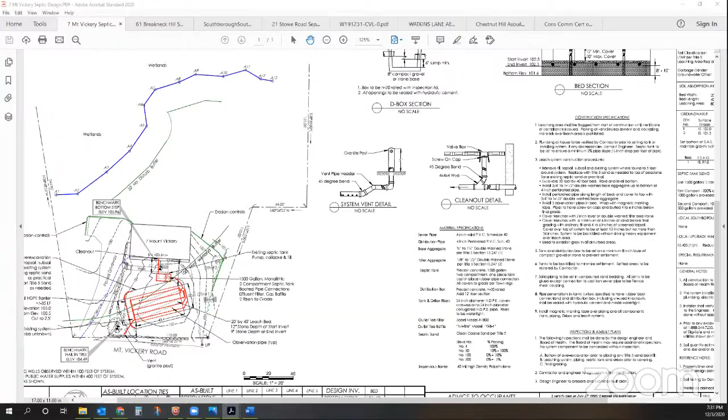Their existing system is in the front yard. We had wetlands delineated in the backyard as shown on the plan. The only practical place to put the system is back right where it is, so that's what we've designed. We put a new system right back in the front yard. It's currently lawn now, and when we're done, it'll be lawn. There'll be no tree removal. Everything is previously disturbed - we're just putting the system back where it is now.

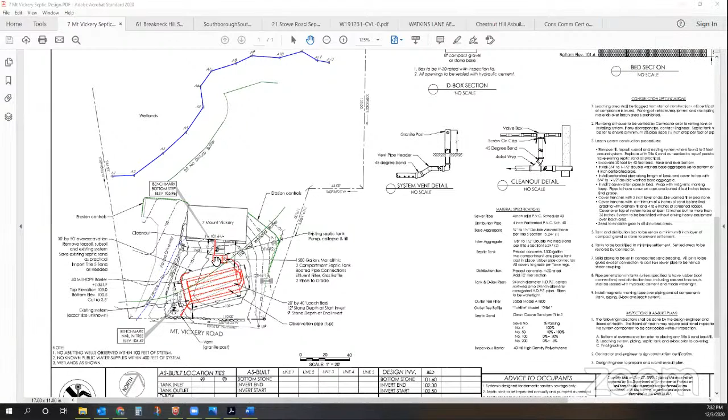Okay, are you looking for a confirmation of the wetland line? Not particularly, I think we just like approval to construct a septic system. And how far away from the wetland is it at its closest point? Oh, about 95 feet. You can see the 100-foot buffer line on the physical plan. Okay, I see it now.

Has this been approved by the Board of Health? I believe they're waiting for conservation approval, but they do have it. Ooh, usually it's the other way around. Well, wait a minute, I'm sorry - this one has been approved by the Board of Health. That's right, the approval went to the homeowner, not to the engineer. I'm the engineer on it, so. Okay, I don't have any other questions. Anybody else have any questions?

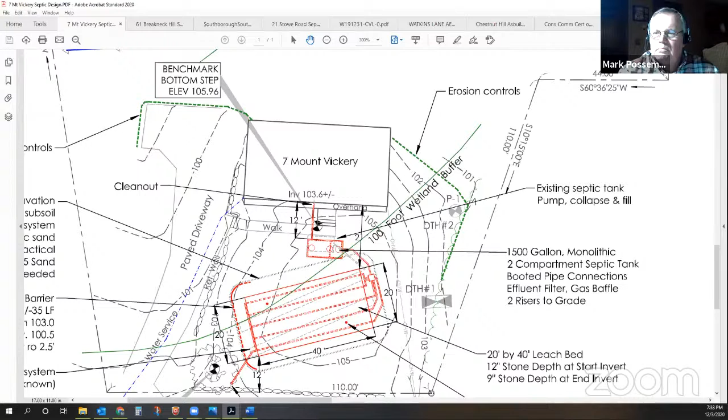No other questions from the commission? So this is determination of applicability. And we did not engage Lucas Environmental on this, did we?

We did. Matt did do a review. I don't see him here. Is he here? Here. Yep. Oh, there you are.

Do you have any comments on this, Matt? No, not really. I walked the site, the wetland boundary looked fine, but as you had asked, they're not really asking for approval of that. Really no other comments. It looked fine to me.

All right, and where the erosion controls are, everybody's happy with that? Which is basically the end of the driveway? Looks pretty flat. Site's pretty flat. It starts to slope down in the back, but I thought the erosion controls looked fine from my perspective.

Okay. Do I hear a motion for... do you want to do the public real quick? Oh, I'm sorry, yes. If anyone has a question, please use the raise hand feature at the bottom of your screen. And I am not seeing any hands.

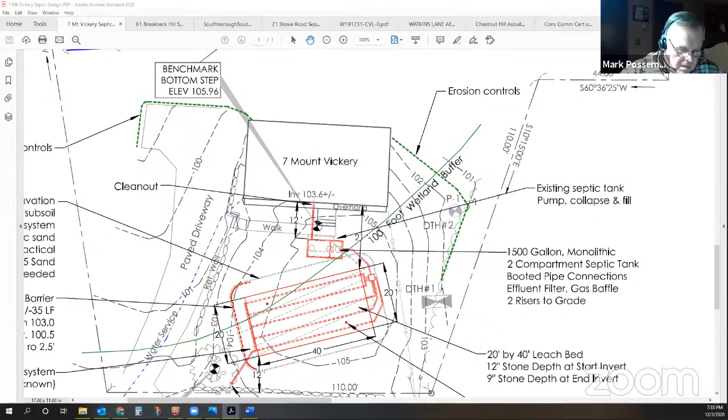Okay, next up is 61 Breakneck Hill Road, map 29, lot 1, a new SMP, stormwater management permit, in accordance with the provision of the Southborough Stormwater Erosion Control Bylaw, Southborough Zoning Code, Chapter 174, Section 13.5. The Southborough Conservation Commission will conduct a public hearing on Thursday, December 3rd, 2020 at 7:10 p.m.

by a virtual Zoom meeting on the petition of Quality Framing Contractor, Inc. for approval of a stormwater management permit for the construction of a single-family house at 61 Breakneck Hill Road, map 29, parcel 1. Mr. Chairman, yes, I'll be recusing myself.

This is my next door neighbor. Okay. So noted.

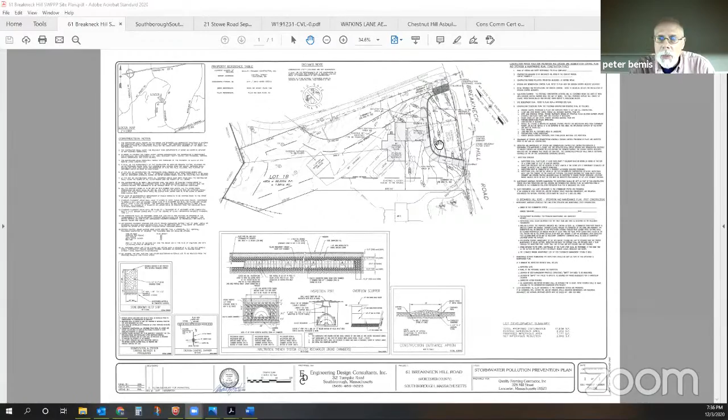Good evening, Peter Bemis here. Good evening, Peter. 61 Breakneck Hill Road is a 68,000 square foot lot. We're on the northwest side of Breakneck Hill Road, and this is pretty much opposite the Harding Botanical Facility. And there was an existing residence on this lot.

It was Ray Davis's home. This is over by the conservation land as well. And the home was razed. The driveway is going through pretty much the center of that old structure, and the new structure is being constructed behind that. We've been limiting our footprint until we obtain this permit.

There is a fairly large lot area here. But with the permit from the board, we would be able to then develop the entire site as shown in the plan. The total impervious area existing is just under 10,000 square feet.

And so with the reduction of existing impervious areas and the construction of new, we actually net out about 2,000 square feet of less impervious area post-construction. There's an existing old barn, garage, if you will, in the back. It's kind of where the cows used to stay in the winter. And the driveway went out to the back of that. So that's pretty much where most of the reduction in impervious area occurs.

100% of the roof area will be infiltrated. There's infiltration chambers that are shown on the plan. And then there's a perimeter gravel stone, if you will, driveway apron. There's also a construction entrance apron shown, although the site already has a paved driveway, so they've been able to maintain the site access as being fairly clean through this process.

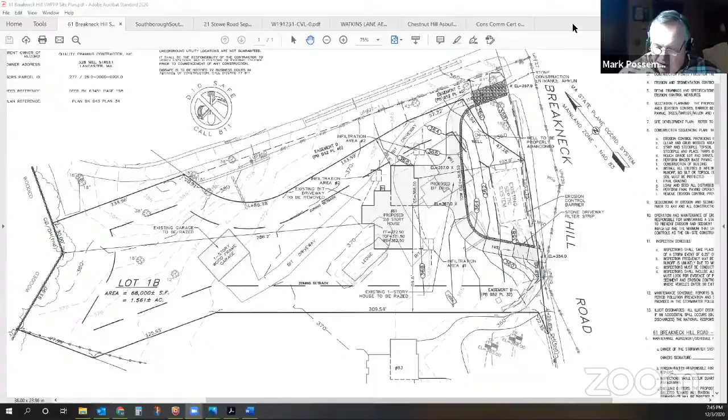Next up is the abbreviated notice of resource area delineation, ANRAD, for 0 Southville Road, map 5 lot 8, in accordance with the Wetlands Protection Act, Mass General Laws Chapter 131, Section 40, and the Southborough Wetlands Bylaw. The Southborough Conservation Commission will conduct a public hearing on Thursday, December 3rd, 2020 at 7:20 p.m. via virtual Zoom meeting. The commission will consider an abbreviated notice of resource area delineation for a project located at 0 Southville Road, map 5 lot 8, for the applicant JAH Properties. The project description is confirmation of resource area boundaries.

It's upside down. They were in the public, but now I can't see them. I will send them a message unless they're under another name.

How about we go to Stowe in the meantime, and... okay. So we'll leave that open for the time being and come back to it.

So 21 Stowe Road, it's a request for determination of applicability, map 91 lot 1, replacement of septic in accordance with the Wetlands Protection Act, Mass General Laws Chapter 131, Section 40, and the Southborough Wetlands Bylaw. The Southborough Conservation Commission will conduct a public hearing on Thursday, December 3rd, 2020 at 7:30 p.m. via virtual Zoom meeting. The commission will consider a request for determination for a project at 21 Stowe Road, map 91 lot 1, applicant Tom Truong. The project description is replacement of failed septic after emergency certification.

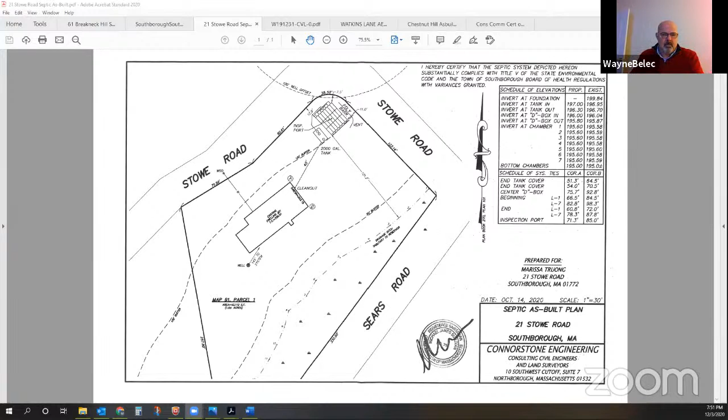His finance source is a little freaked out with COVID right now, so they're probably looking to table this, see what happens with COVID through the winter, and look to resume in the spring. I did get him a proposal, but he hasn't signed it because he just wants to see what's going on. So we did go with the ANRAD route.

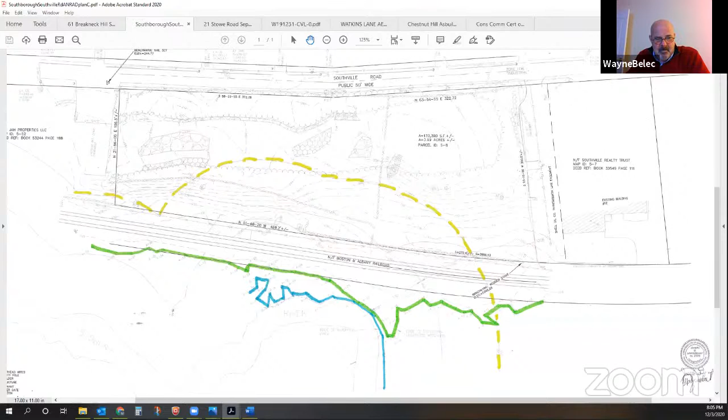Okay, thank you very much for the summary, Matt. I thought that was absolutely spot on. That's what I would have said also.

Yes, I think it's a great idea for us to meet out there, and I just wanted Matt to know, feel free to email me when you get a second and give me some open dates in the next week or so, and we'll meet out there. Okay, good.

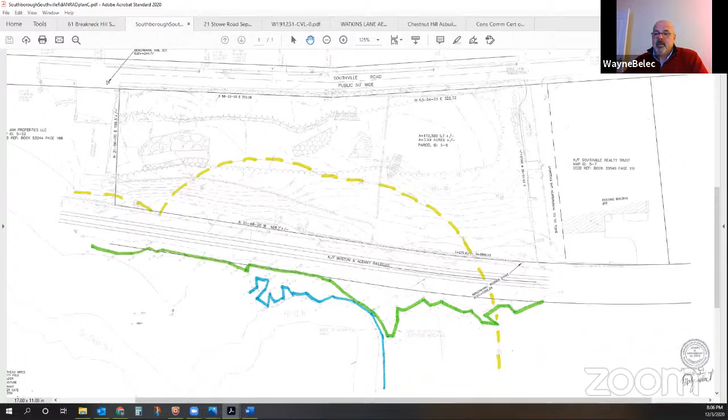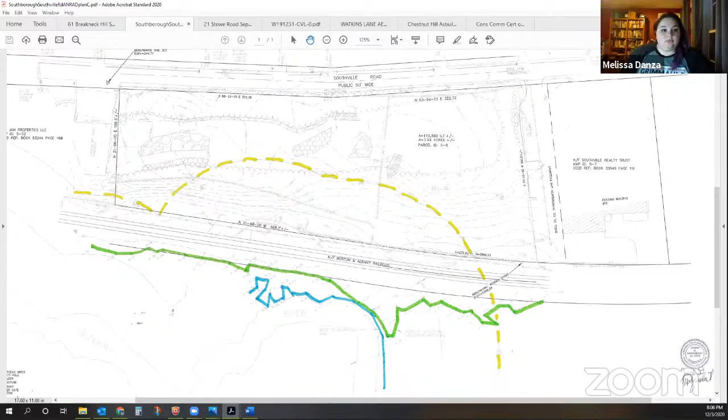Okay, next we have 96 Mount Vickery, lots 1 through 5. Where are we here?

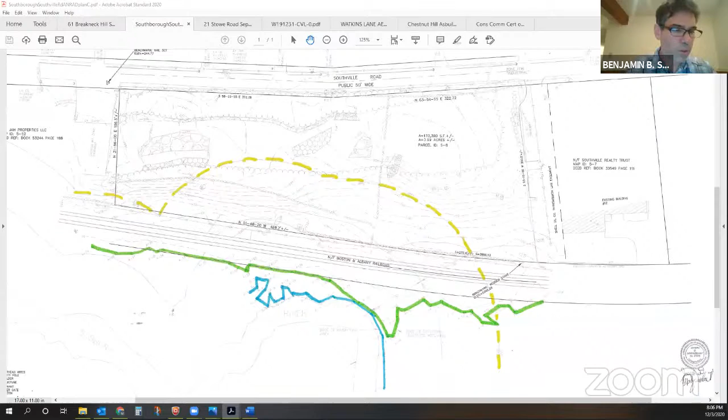In accordance with the Wetlands Protection Act, Massachusetts General Laws Chapter 131, Section 40, and the Southborough Wetlands Bylaw, the Southborough Conservation Commission will conduct 5 public hearings on Thursday, December 3rd, 2020 at 7:40 p.m. via a virtual Zoom meeting. The commission will consider 5 notices of intent for projects located at 96 Mount Vickery Road, lots 1, 2, 3, 4, and 5, to be known as Ruby Estates, map 28, lot 18, for the applicant Bartolini Properties. The project descriptions are construction of single-family homes, septic, and associated infrastructure, including stormwater features. These hearings will be held concurrently.

Okay, who do we have here this evening presenting the plan? Good evening, Jim Bernardino with Bohler Engineering, representing Bartolini Properties for the applications in front of you this evening. We do have Michael, Tony, and Greg from Bartolini Properties also online or at least in the waiting room. They may chime in from time to time as I go through my presentation, or they're available for questions and answers as well.

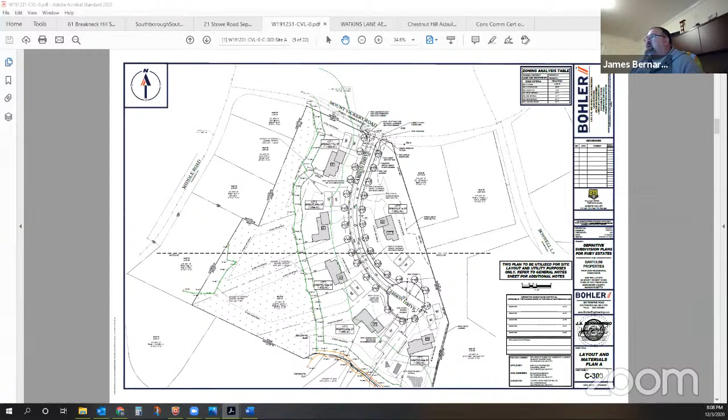Melissa, maybe it would be worthwhile for me to share my screen. I'll run through the plans, and I could pan and point and highlight particular areas, if that's an option. All right, just give me one second. No problem, I think it'll go a little smoother that way. All right, you should be all set to share. Let me just maximize that one more time. Share. Here we go.

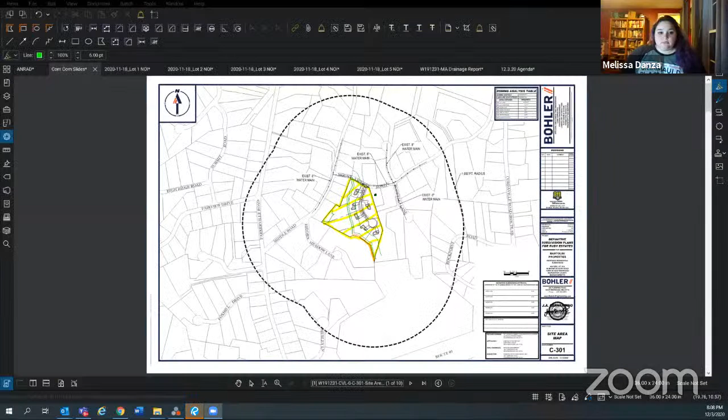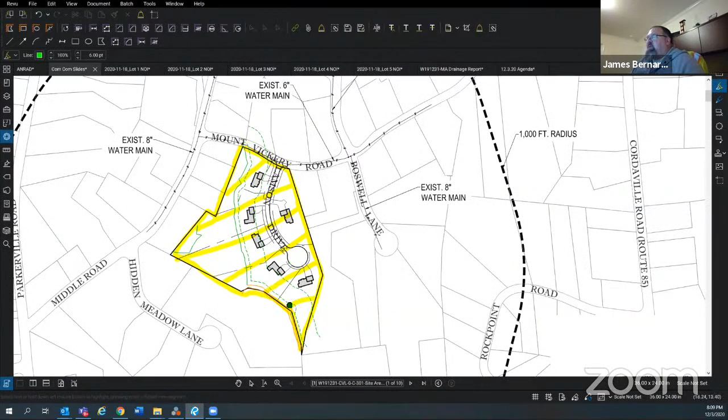Okay, here we go. Everybody should have a PDF of the overall site area map. For those not familiar with where the site is located, it is 96 Mount Vickery Road, south of Route 9, off of Middle Road, south of Vickery, bounded to the south by a residence along Hidden Meadow Lane, same thing with residents along Roswell. Highlighted area is the subject site.

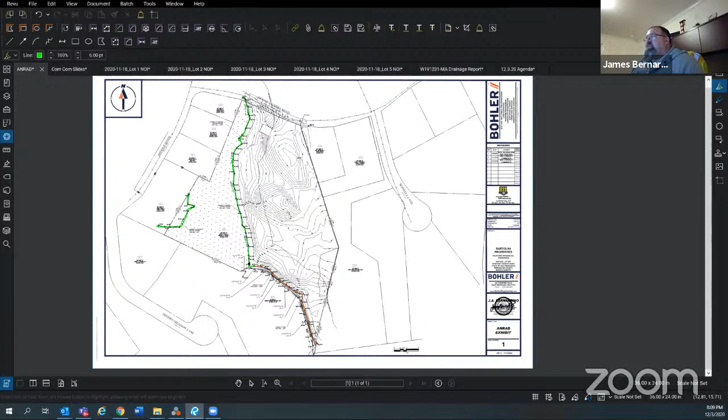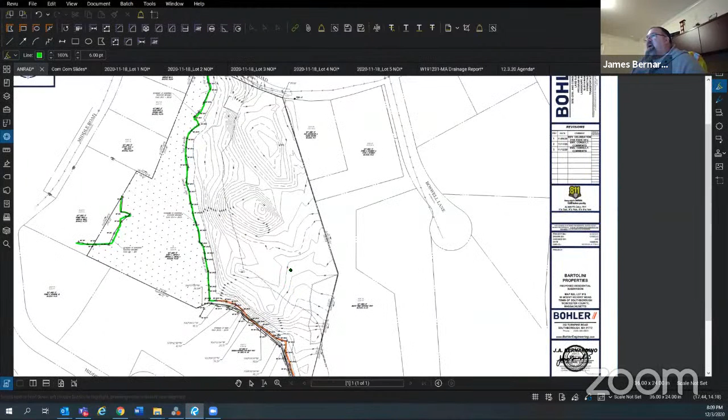You may recall last month we were in front of the commission to discuss the ANRAD for the resource area for the subject property. This was the ANRAD plan approved last month, showing in green the limits of the approved bordering vegetated wetlands, as well as the orange area, which was the edge of bank. Both resource areas were discussed with the commission, reviewed by your consultant, Lucas Environmental, and ultimately approved last month at your hearing. These wetland lines were the basis and limits of consideration for the development of the proposed residential subdivision, being called Ruby Estates.

Ruby Estates is going to be a proposed subdivision consisting of a proposed roadway of approximately 570 feet long. That roadway will allow for the creation of 6 residential lots, all having a minimum lot area of 1 acre or greater.

Before I dive into the specifics of the site, I'd like to give the commission a little background as to how the applicant came to this plan as a final proposal to the town. Over a year ago, the applicant gained development control over the property. Things were a little slow at the beginning because of COVID.

Over the last year, they've considered multiple layouts for the proposed development in consideration of minimizing the overall footprint and impact of the proposal. They initially prepared several alternatives with a smaller footprint that would fall under the town's regulations for a flexible development, allowing for a shorter roadway, potentially smaller lots, and an overall smaller development footprint. The applicant took those alternatives and discussed them with the planning board on multiple occasions. After several meetings, the ultimate resolution and directive was that a conventional subdivision was the alternative proposal for this site.

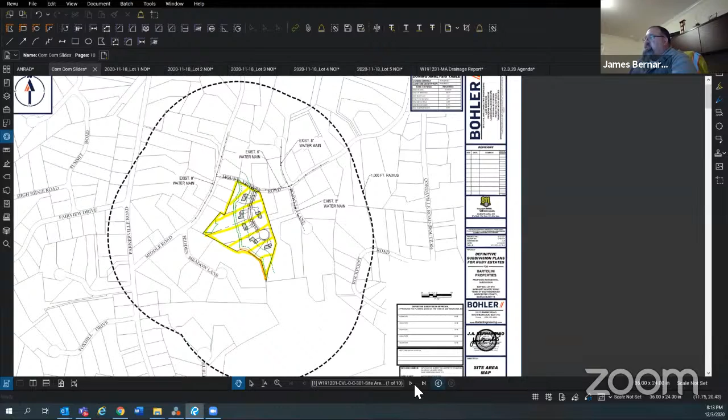I'll zoom in. So we have our proposed roadway. There's an existing house located in this area here. That house will be demolished, razed completely as part of this overall development.

That being said, it does have existing water service, and the entire subdivision will also be serviced by public water. However, we have been doing soil testing on the site to allow for proposed septic systems. Each house will have its own individual septic system, and the layouts provided to the commission show proposed locations we are currently working on and seeking approval for from the Board of Health.

Looking at lot number 1, the edge of wetland is shown in green. The locally regulated 20-foot no-disturb buffer is also shown as an offset, and all work is located outside of that 20-foot area. On lot 1, the house is located primarily entirely within the 100-foot buffer zone. The limit of the house is approximately 47 feet off of the closest point of the bordering vegetated wetland.

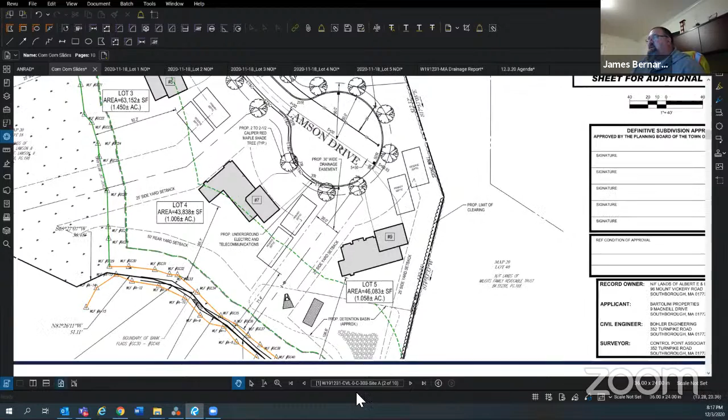Moving back around, let me go to the next slide. So this is lot 4, even though it says number 7, that's just going to be the future street address. Lot number 4 is, again, just over 1 acre, as is the majority of the lots.

The house is going to be situated approximately 85 feet off the nearest regulated resource area, which is where it turns into the bank for the intermittent stream along the southwestern property line.

Lot number 4 is going to result in approximately 16,000 square feet of buffer zone alteration. The primary septic field is anticipated to be located outside of the 100-foot buffer, with the reserve area split between the 100-foot buffer zone and outside of that regulated area.

Lot number 5, the house is completely located outside of the buffer zone. However, there will be some minor alterations along the edge for the construction of lot grading.

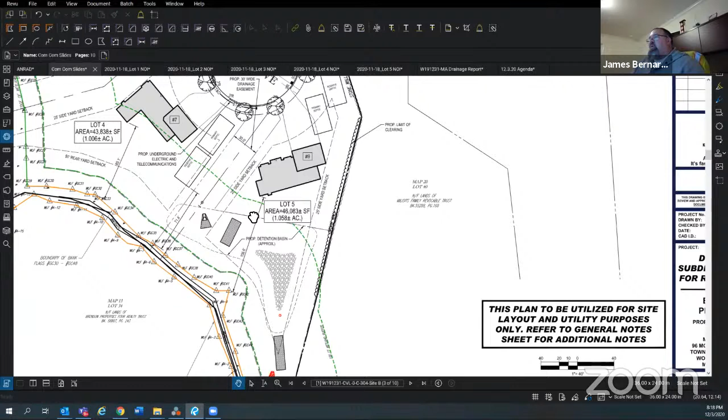As we mentioned before, we will be doing a separate notice of intent coming up in a couple of days. Hopefully we'll be able to hear this concurrently the next time we discuss the project with the commission. But that forthcoming notice of intent will cover the impacts associated with the drainage infrastructure for the overall subdivision and roadway. That subdivision and roadway within lot number 5 would result in approximately 18,100 square feet of buffer zone alteration.

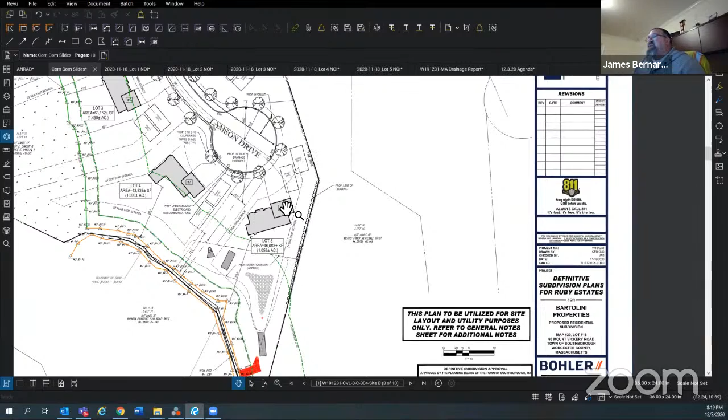Again, that detention basin will be designed such that no alteration to that 0 to 20 foot regulated area would happen. So no alterations 0 to 20 feet. And septic systems associated with lot number 5 are anticipated to be located outside of the 100-foot buffer area.

Lot 6, there's no notice of intent for that, but as you can see, that's on the other side of the roadway, which is outside of the regulated areas of the bordering vegetated wetland or the bank resource area that's on site. Likewise, the entire roadway is located out of that 100-foot buffer zone.

As part of the overall subdivision, we did take a look at impacts cumulatively of the overall development. The impacts were analyzed for various different aspects.

One, erosion control. We have developed a comprehensive erosion sediment control plan as part of the development package and the subdivision plans that were in front of the commission. We've also developed a comprehensive stormwater collection, conveyance, treatment and infiltration practices, which are inclusive of deep sump catch basins, a sediment forebay, and a BMP water quality practice infiltration on lot 5 itself. The proposed design does meet the stormwater standards for water quality, treatment, and infiltration practices, and the like.

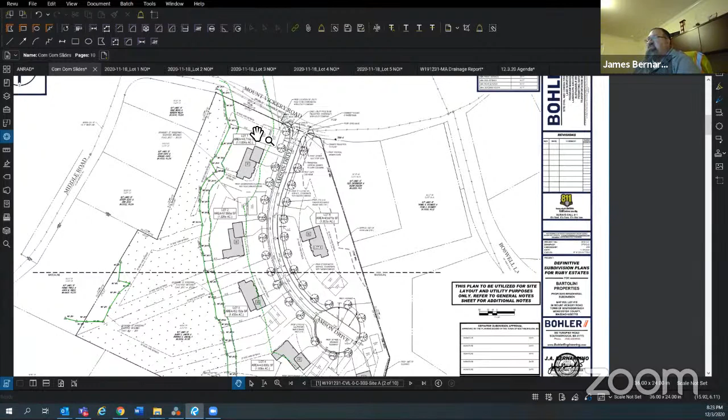Another comment that was brought up was a consideration that we look at seed mixes along the edge of our development. This is a grading plan, and we do have some 3-to-1 slopes along the perimeter of the site.

It recommended that we take a look at potentially utilizing a different seed mix than normal that would be more indicative of woodland wildlife or woody value type of seed mix. I do have a landscape architect on staff. We'll consult with him and the applicant to find out what best practices can be implemented to enhance the value of that area as it is in proximity to the resource area. So we will take a look at that, consult with our landscape architect, and develop a plan to see what can happen for enhancements in those areas.

Number 4 would be to adjust the erosion controls along the limits of work. Basically, the majority of the erosion controls at this point run along the barrier or the perimeter of that 20-foot offset. There are locations on the site where edge of grading and limit of work are a little further away from that buffer. We can make those adjustments to minimize the extent of the limit of work and bring it closer to the limits of the proposed development and grading.

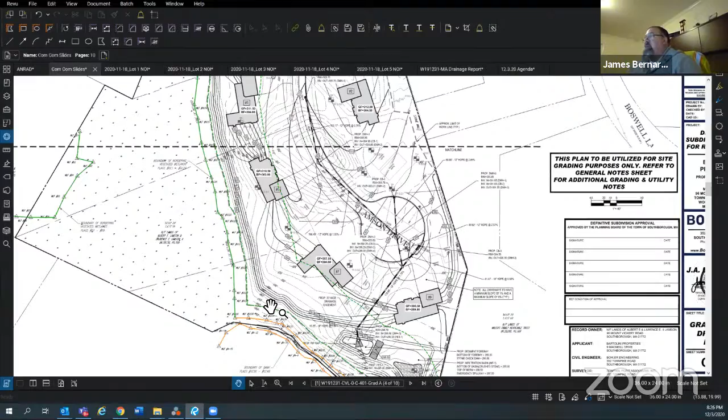Lastly, we did receive, and I'm sure the commission has copies as well, numerous letters from the neighbors in the surrounding neighborhood voicing their concerns about the proposed development. Obviously, the development as proposed does have impacts, and the concerns voiced by the neighbors are impacts that resulted directly from the construction of the subdivision. Some of the comments were about the value of the upland areas, some drainage concerns, and groundwater concerns as well.

Our plans and our comprehensive stormwater evaluation have considered those potential impacts with our designs, from a stormwater perspective and erosion sediment control, and the BMPs that have been implemented for construction activities. We believe that those types of impacts the neighbors have voiced are addressed with our design plans and the computations that have been provided to the commission.

Lastly, many of the neighbors have spoken out regarding the developer's past project and how he's currently altering land with clear cutting. Obviously, that's not the developer's motive. What's mentioned by several of the abutters as clear cutting is actually not the developer's project. They're talking about a development down the street that's currently been clear cut, which is directly adjacent to a development the applicant has constructed. However, the applicant, Bartolini Properties, has no association with that current clear cutting operation. Bartolini Properties is actually disappointed that's happening directly adjacent to their property, because that is affecting their past customers and the overall presence of their development.

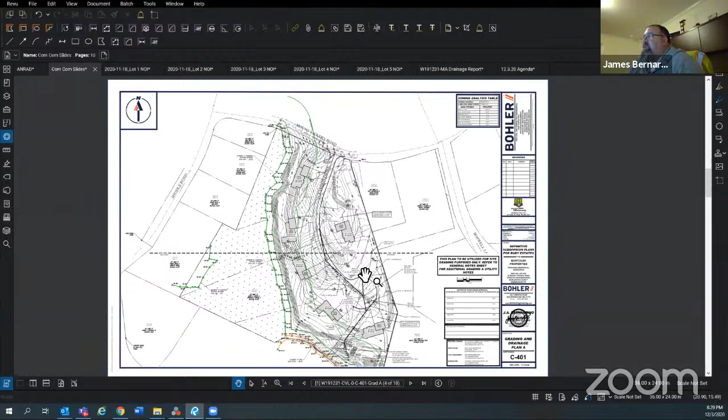If anybody from Bartolini Properties wants to add anything, feel free to jump in as well. But at this point, I would turn it over to the commission for feedback and any comments you may have. Thank you, Mr. Bernardino.

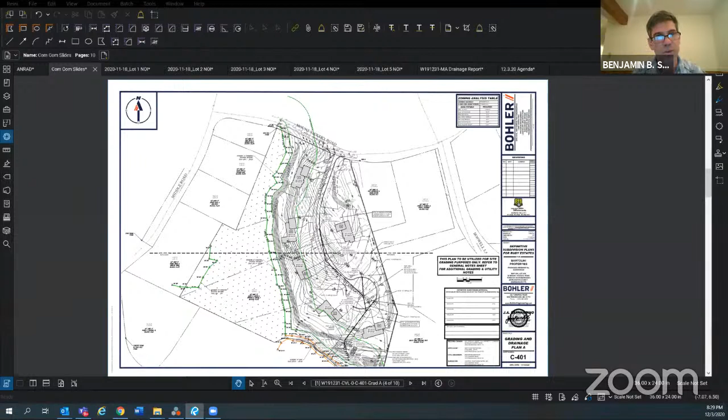So we are still waiting, of course, on the notice of intent covering the roadway and detention pond and all the drainage work associated with that, as well as the stormwater management permit, which I understand is going to cover the entirety of the project in a single application.

Melissa, we are waiting to submit this to Fuss and O'Neill for review until we receive those materials. Is that correct? We received the materials, I got the task authorization from Amy from Fuss and O'Neill, so I sent the amount off to Bartolini. I'm just waiting on that check, and then that review will start and it will be on the agenda for the 1/7 meeting.

And for those in the audience, Fuss and O'Neill are consulting civil engineers who are going to be doing an engineering review of the project on the commission's behalf.

Our environmental consultant, Lucas Environmental, was referred to by Mr. Bernardino. Matt, do you want to go through your comments?

I think Mr. Bernardino hit them pretty well, to be honest with you. I think the only one I would focus on a little bit more is, again, a lot of the comments are common across all 5 applications, with the difference being on lot 1, the question of the demolition work, and on lot 5, the question of a separate notice of intent for the infrastructure. I think it sounds like both of those have been addressed. But I'd probably focus in on the comment with regard to the amount of proposed clearing on the site. And I know Mr...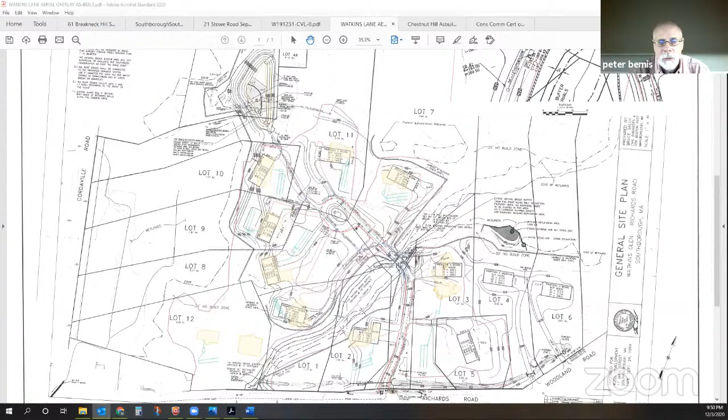That's it as far as the words are concerned. The plan in front of you is probably the most important thing. Melissa had said, look, can you provide us with an as-built? So this plan is a red line as-built, overlaying the plans done by Bruce Salick Associates, which was the permitted plan for this project. You'll see the roadway is constructed pretty close to what was proposed.

There's very, very slight deviations in the shape and geometry. The houses—I'm sorry, the color's not coming through great here, but on the color plot Melissa got, it's pretty good. They're kind of in an orange color, and we show specifically that outline.

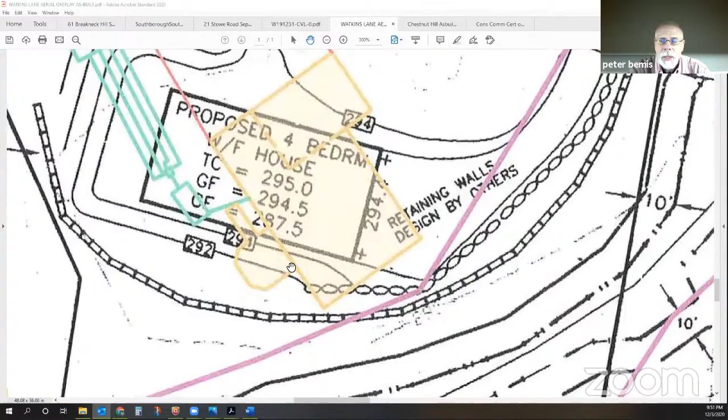You'll see, for example, that is the lot 1 close-up now, and again, that has its own certificate of compliance already issued. What we're asking you for now is for that old order. But we brought in the details that we had available to us, which is the driveway location, the building envelope, the septic system, and then the limit of work.

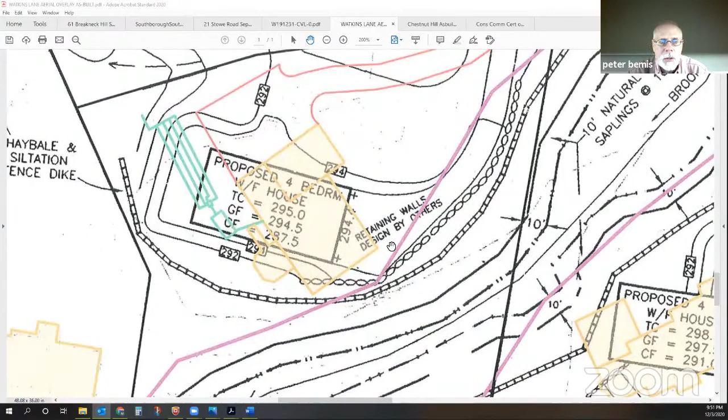This heavy pink line here running throughout the site is the limit of work. Fortunately, with the advent of GPS, we were able to get a nice, good, accurate reading on that for this project. If you could just pan over to lot 3, because it's lots 1 and 3 we're going to get tonight.

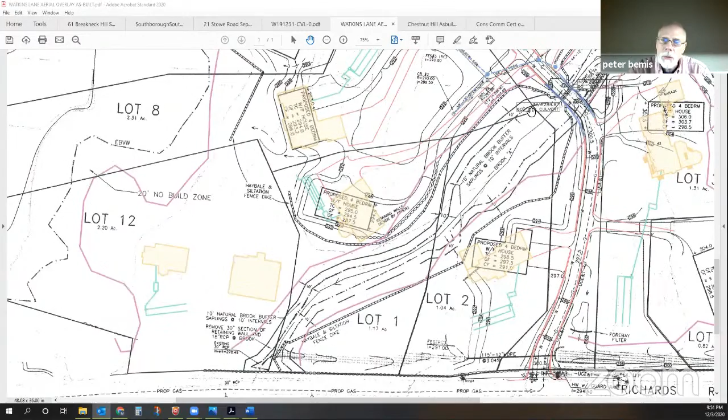On lot 3, you can see the house was actually moved considerably away from where the wetland resource area was in the base build, and the small garage located to the north is what was on the order of conditions for 863 that I've asked you for the certificate on.

Again, they follow the limit of work pretty closely. Drainage is also shown on here. If you just pan a little bit, you'll see the crossing here. There's a retaining wall that was built, and then there's a series of catch basins that go out to the stormwater management system. For the meeting in January, we'll try to get our arms around all of that.

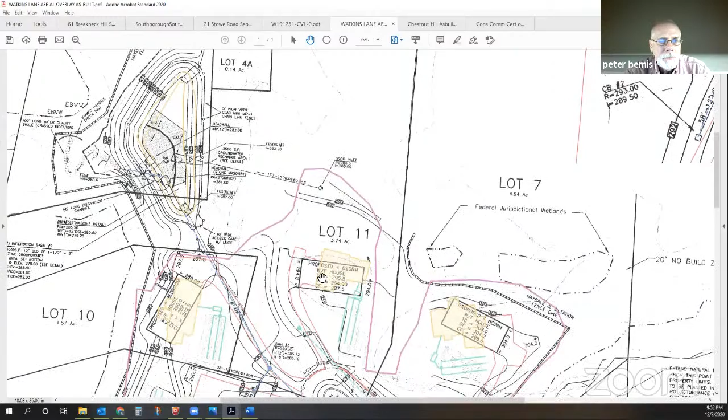So I'll be happy to answer any questions. Thank you.

Go ahead, Phil. So I guess the question is, do all these lots satisfy the order of conditions? Yes, to the best of our ability that we could find, they satisfy the original order.

These were also amended, and they were amended all in one amendment. So it's taken over a month to really go through all the filings to determine which lot was which application and what they were trying to get across.

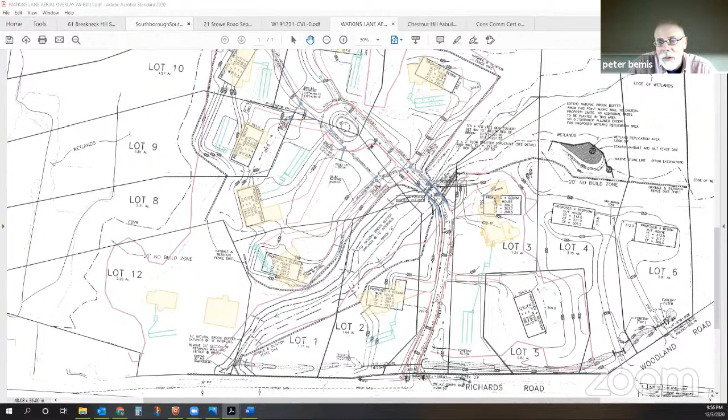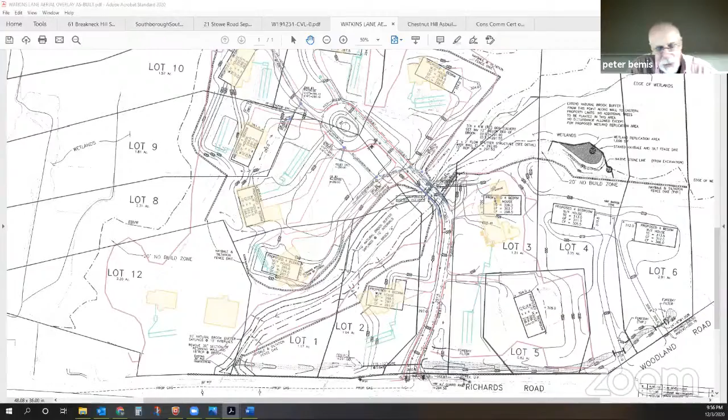It's not even on any of them, Matt. Again, this was not done in a uniform way at all. I don't even know how they doubled down on every lot too, so they submitted 2 lots per notice filing. Obviously I think they did it to save money, because I think they did it as one application. But again, that's so long ago, and unfortunately we have this paperwork we have to try to walk through.

Melissa's been kind enough to meet me. She brought her whole file outside. I took pictures of all of the sheets because, again, with COVID, it's just hard to be able to reproduce some of these documents.

Like I said, what I was comfortable doing tonight with you was asking you for these 2. They are totally independent, well, they rely on the driveway for their access, not their frontage. Lot 7 relies upon that. And I'm only asking you for the partial because I think an attorney would surmise, how do I get to this house if I don't go down the street, and how did you get permission to be there? So I'm only asking you to sign off on the lot itself over that portion of the road. And when I come back on the January 7th meeting, I'll try to define all those other pieces better.

We didn't even get to go look at that replication area from my perspective in my office. I wasn't prepared to do that in the timeline that we had. And there are also 4 total notice of intent, so it's not even just these 2 that we are thinking of doing, or partials and maybe a full one. There's 2 others that address other lots, but also other aspects of this development. So it was kind of awkwardly done in that some have very lot-specific ones, and I think the ones that Peter did pull out for the most part are ironically the more specific ones. So there's at least 2 others that we have to address as well.

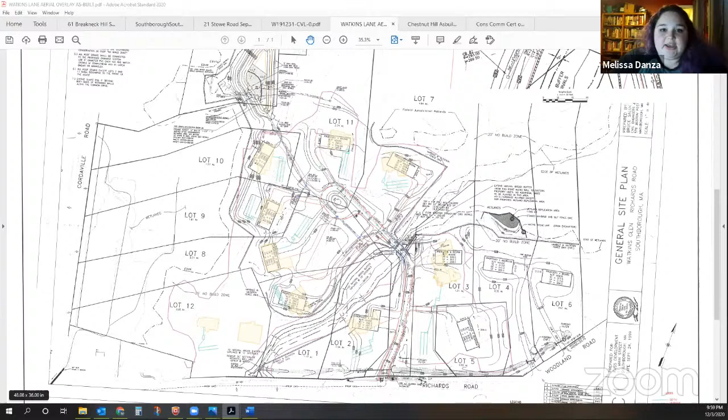So my recommendation would be to issue a full certificate for 290-863, which is 3 Watkins Lane, a partial certificate for 290-581 for lot 3, which is 3 Watkins Lane, another partial certificate for 581 for lot 1 Watkins Lane, and a full certificate for 290-586, which is for lot 1 Watkins Lane.

Very quickly before we vote on that, I had one quick question. Peter, you mentioned that some of the wetlands had some trash in them or something. Was any of that near these ones that we're issuing orders of conditions for? Specifically, the garage looks like it's very near the wetland. Is that clear now? Yep.

I'll answer you honestly here. As I said, I did clean up all the areas specifically for the lot 1 property back in 2008. There were some leaves over by the bridge, but that's associated with lot 7 itself, it's on lot 7. So when I come back to you for lot 7, it's going to have to be cleaned up. I've told the HOA that they will have to clean that area up, and they're aware of it.

And on lot 3, there was a tree that had come down on the Burns property on that side of the garage, and some of that brush is still there. The landscaper is going to remove it. I have both the word of the owner and the landscaper. I said to Melissa, I have no problem with you holding that until I tell you that it's been done. I've given her my word on that as well, so I'm fine with her holding that until I prove to her that the brush has been removed.

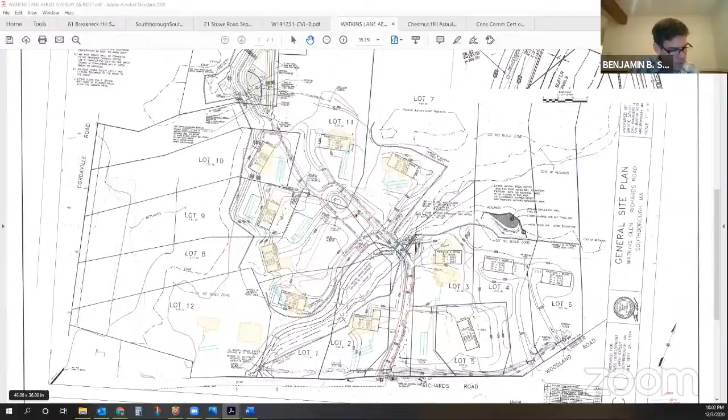Okay, another certificate of compliance on Chestnut Hill Road. That's right, the widening there. Sorry, can I just, two-way.

Sorry, Ben, can I just say, Melissa, that I think that was a really great piece of detective work, partnering with Peter in order to get that done. I think it was a couple of meetings ago we had the discussion about the importance of the annual report and how it saves both the applicants and the commission a huge amount of time if we make sure all these things happen on a timely basis. I think that was a perfect example of why it's so important to be able to keep that audit trail. So kudos to you for doing that.

Thank you. This was definitely some detective work because most of them didn't even reference like lot X for Watkins Lane. It was literally all the roads that surround it. So we went through that whole section of time to figure out which ones may be possible versus not, and thankfully it was just 4. Sometimes the numbers didn't make sense, but that's okay, we got it, maybe. So we'll move forward, but this was an interesting one.

All right, is there anyone here for Chestnut Hill Road? Oh, you said Vito is on vacation or something. Yeah, and Matt did do a review, if he wants to go over it. There wasn't anything, at least that I saw, that we needed Vito for.

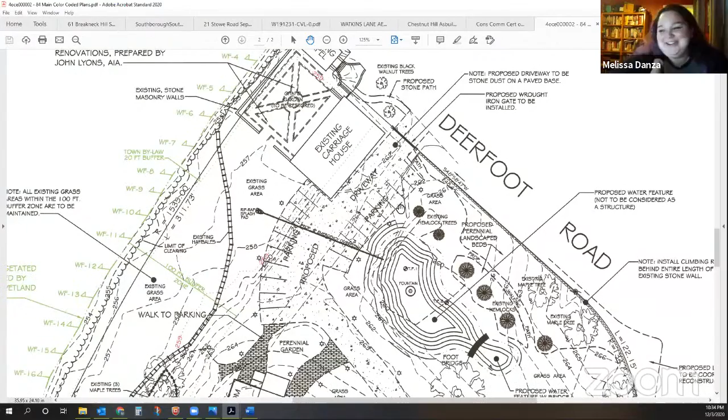Yeah, I think that's something we have to look into. And I don't mean to stop discussion in any way on what Russ brought up. Every time I drive past there and see it from Parkerville, taking my kids back and forth to school, I kind of grit my teeth every time. This isn't what we were told was going to happen.

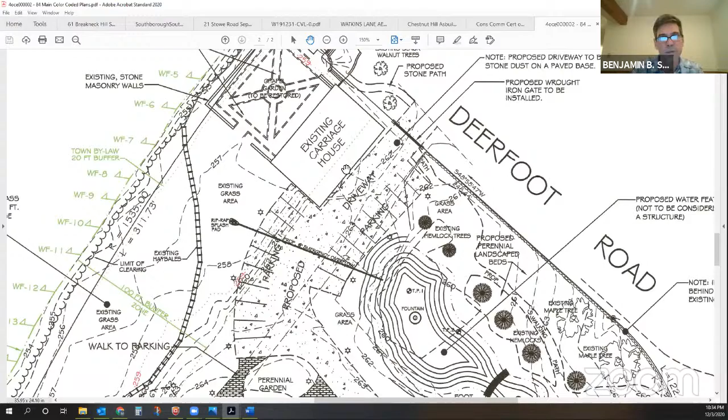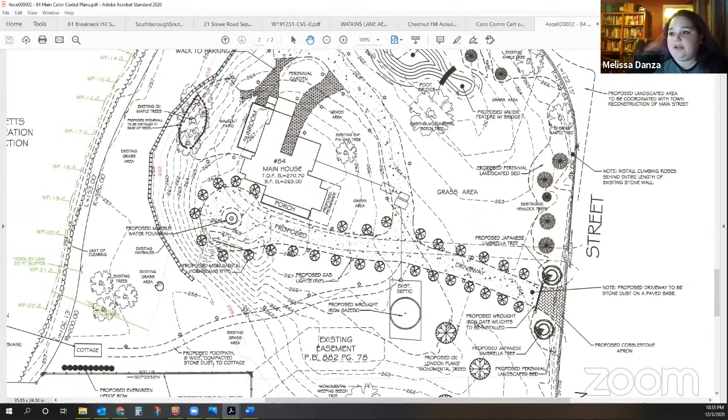I also have a follow-up with Peter about the final spec plan for this rain garden area, because I never received that as well, so that's also on my docket. I don't believe they've started that, and that's probably why he hasn't gotten it to me. I know he's been pretty backlogged, but at the same time, this site has had enough issues.

I did see it looked like there was a lot of activity around the cottage when I drove by the other day. Yeah, looked like there was a lot of contractors working, roofing it last week. Yeah, they were putting a roof on last week.

So I'll follow up with them about the spec plan for this, when the planting and scaling back of the riprap is going to be. Ask him when he's going to take out the riprap. I think it was difficult to understand, in that the original request for the clearing of that embankment did include riprap, just not to the extent that it was installed.

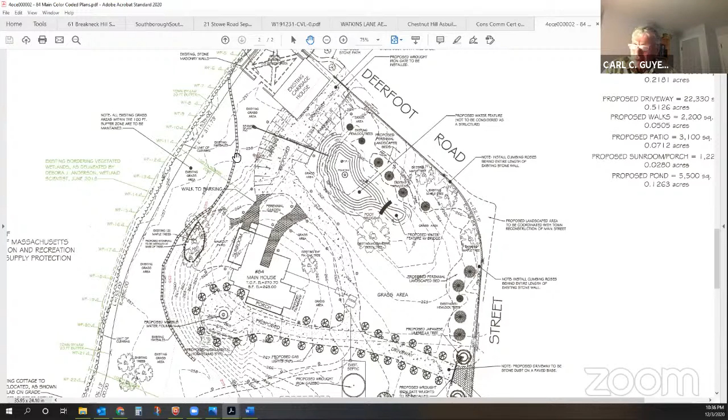No, Melissa, can I interrupt you? The plan that was presented to us, there was no mention of riprap. He presented a different plan to DCR, is what I think happened. We did receive the same documents. I think what's difficult is that he geared it more towards the invasive management aspect of it and didn't necessarily highlight the final conditions, which may be where the differences lie.

But could we still ask to have it all taken out, since he hasn't complied with what he told us he was going to do? Right, yeah. No, but I will follow up with Peter and JDP about those.

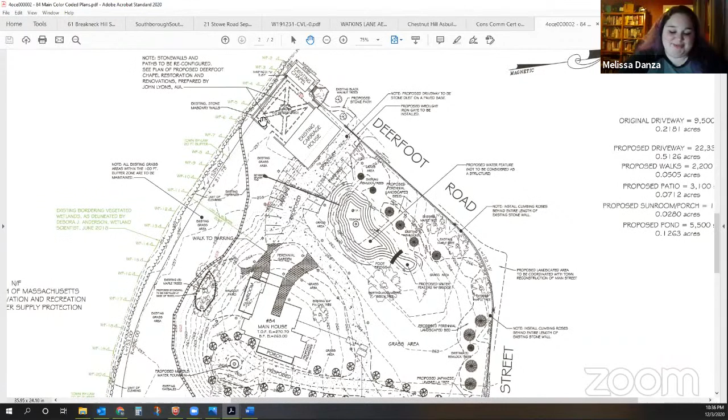Yeah, you can quote me as the bad cop, right? I don't need a bad cop. It's fine. All right, one other bad cop issue down the street from me on Middle Road. I don't know if you guys have been over there to look at that.

We approved a notice of intent for the wetlands, right? And they told us they weren't going to need a stormwater permit because the disturbance was going to be less than half the lot. And boy, it doesn't look like that now. They've also gone over to the next lot, and I think they've disturbed enough area to require a stormwater permit there too.

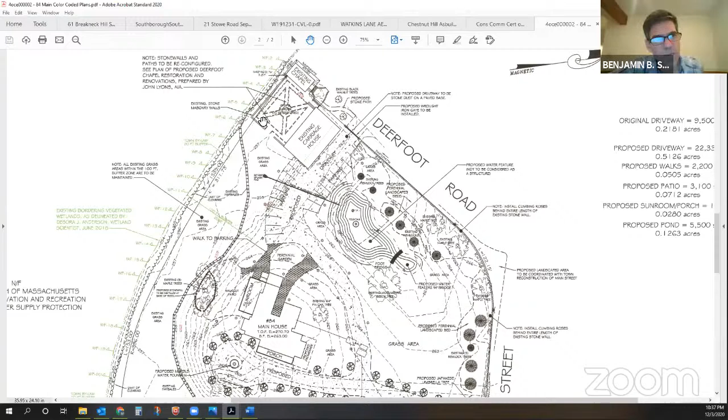This across from Fay School? No, this is just down the street from me. Oh, excuse me, I'm sorry. This is next to the trolley line. Yep, next to the trolley line, right? So it looks like they either don't understand what we're telling them.

Not to cut you off, but they have submitted 3 SMP applications after the fact. I know, so this was one of my other business items to bring up, in that what does the commission want to do in the meantime, because they have gone over the threshold.

I have had some trouble communicating with the builder. Peter is also the point engineer on this, in that last week my request before Thanksgiving was to have erosion controls in and come into as much compliance with the stormwater bylaw as possible. Yes, it's a holiday weekend, but this was extremely important, especially on the wetland side. And come to find out, on Monday when I followed up and was talking with Mark earlier in the week, they had still not been installed.

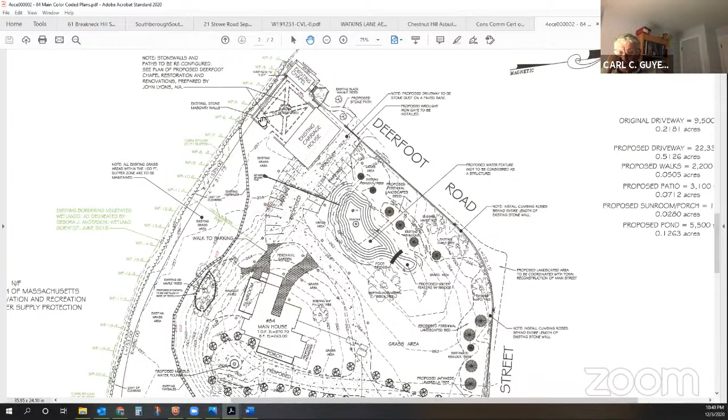Well, I'm in the camp that they should stop, stabilize, and then wait for their stormwater permit. I mean, we can only get run over so many times. They should have known better. They did know better.

I tend to agree with Carl. I mean, we try and be mindful of individual situations, but this one just sounds as though it's too much of a variation. So I think we should say cease and desist.

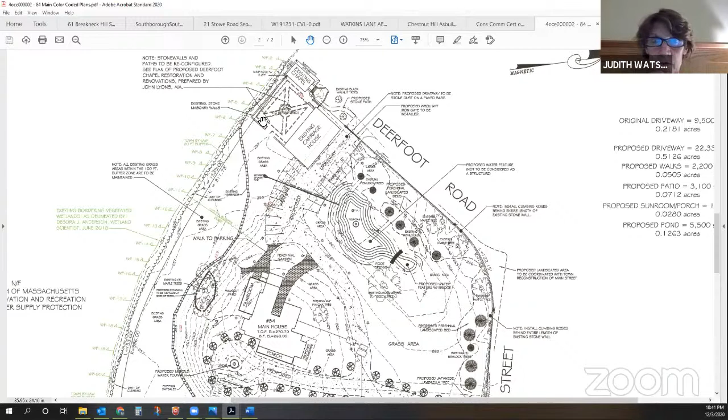Is it just stormwater? I don't remember. Is this the plan we're looking at here? Oh no, sorry, this is the old plan. Is there wetland as well?

So we did issue a notice of intent for 151 Middle Road, which if you're looking at them from the street is the leftmost lot. So there's 3 separate lots. Let me see if I've saved them yet, and I can bring up the SMP plan. So technically the 151 had a notice of intent and subsequent order of conditions, but the other lots are outside of the buffer zone. And when they were before us for an NOI, they stated that they were going to be under the 50%, but have since filed for all 3 lots.

And did they clear anything in the buffer zone? Yes, oh yeah, so yeah. Hold on.

So I'll make a motion that we proceed in that manner: we tell them to stop. I think we should also ask them to stabilize, because we don't know how long it's going to take them to get a stormwater permit.

Yeah, and Melissa, you tried the good cop approach. You asked them to get the stormwater controls in place to get them in quasi compliance, and they simply failed to act. Yeah, and they are in place now, because when I was talking to Mark, he said if they're not done by the end of the day, then the cease and desist is warranted. So they were completed.

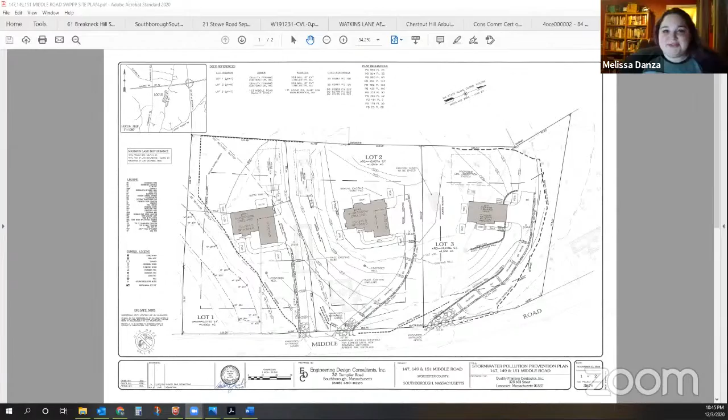So one thing we might have discussed last year around this time is that the fire department has their Christmas tree sales in the golf course parking lot. Technically, under section C7, this would need approval by both holders of the CR, which would be the Concom and the SVT. It does fall within the confines, and talking with SVT, they agree on the cultural aspects of the clubhouse parking lot.

So the request was for an ongoing approval every year for the yearly sale of Christmas trees in the parking lot. So what I would do is create a document, talking with Kristen O'Brien from SVT, that both of us would sign noting that the commission agrees or approves this use of the parking lot, and going forward it doesn't have to be approved every single year.

Anybody ever want to be a Grinch? You can be Grinch now.

That's something though where it would be very specifically just the sale of the Christmas trees. Correct, and we were also going to condition it with the approval of the golf course management company to ensure it doesn't impede on golfing activities. Right, because we don't want it expanding into something like a garage sale. Oh, let's have a garage sale on top of our Christmas trees. Correct, yep, this is just for the Christmas trees.